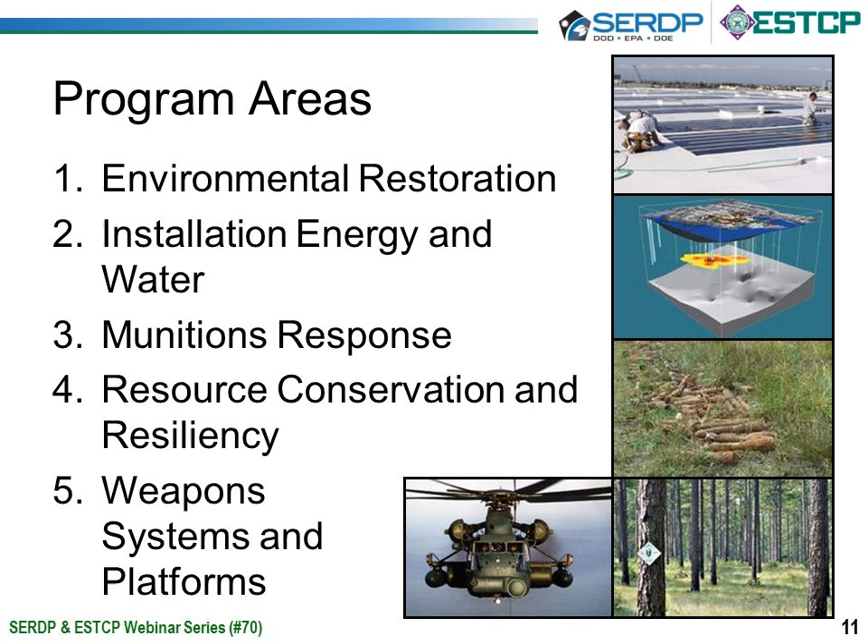Okay, so Weapon Systems and Platforms has 5 program areas. Surface engineering, which these projects fall under, as well as energetic materials and noise and emissions, and lead-free electronics is another area that we have some efforts in. Okay, going to slide 13.

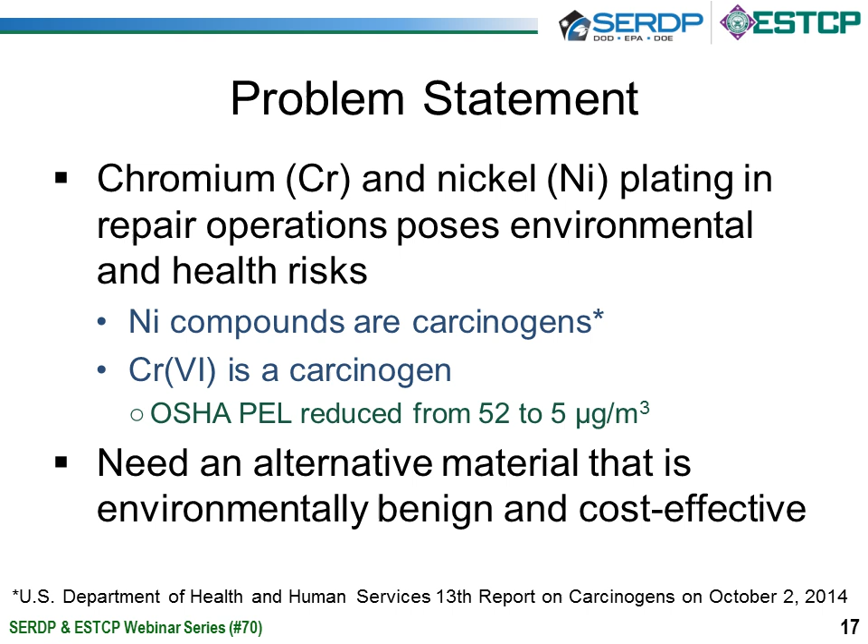So Integran's main technologies involve nanostructured materials. And we started the original project with the question of, can a nanometal coating provide a suitable replacement for hard chrome? So first off, I'll just very quickly describe what we mean by a nanostructured metal. A nanostructured metal is simply a metal coating that has a grain size in the range of 10 to 100 nanometers.

So conventional metals are crystalline and they have grains. And the grain size of a conventional metal is between maybe 10 and 100 microns. So with a nanostructured material, you just simply reduce that grain size, so the grain size is in the order of about 20 nanometers. And by doing so, you get very interesting property changes, specifically as it relates to the hardness and the strength of the material.

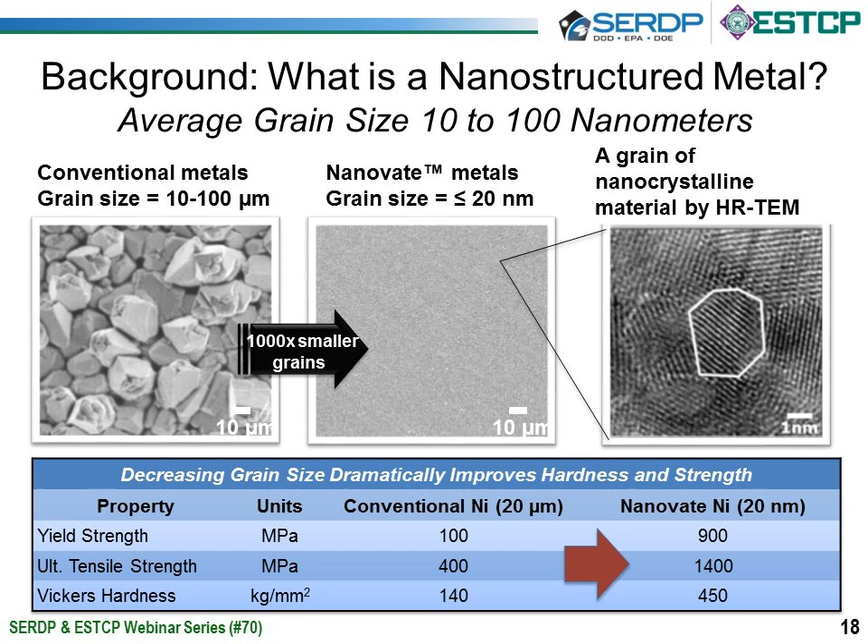As an example, going from a conventional nickel with a 20 micron grain size to a nanocrystalline nickel with a 20 nanometer grain size, you get an increase in yield strength from about 100 megapascals to about 900 megapascals. And similarly, you get an increase in hardness from 140 to about 450 Vickers hardness. So you see tremendous property changes when you just simply reduce the grain size of the material.

So the way that we create our nanostructured materials is through a pulse electrodeposition process. So similar to chrome and nickel, it's made in an electrodeposition process. So you produce the coatings in aqueous baths, you apply a current, and you deposit the metal ions in the solution onto your substrate in the form of a coating.

So traditionally, we've used pulse electrodeposition in order to create the fine-grained structures. And what that achieves is a very fine-grained uniform structure throughout the thickness of the coating. In conventional plating, typically you see a fine-grained structure right at the interface. However, as you grow to thicker structures, you commonly find the grains elongate to larger grain sizes. Through the use of pulse plating, you can favor the nucleation of new grains over the growth of existing grains, and this results in an ultrafine grain structure through the thickness of the coating.

And the ultimate end result of the coating is a fully dense metal with a nanocrystalline grain size. And I should mention at this point that there's no powders involved with the production process. We go from ions in solution to fully dense metal on the plate, and there's no intermediate powders involved. So one of the objectives of our current project, in fact, was looking at whether or not we can produce these structures without the use of pulse plating. So I'll go into that a little bit later when I talk about the project.

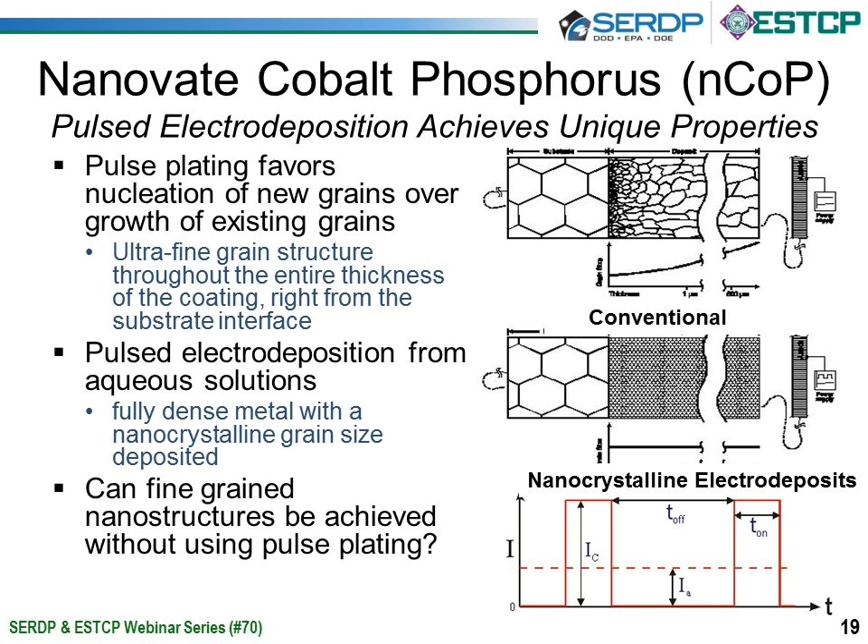So after many iterations and looking at a number of different materials, we settled on a cobalt phosphorus alloy composition as the preferred solution as an alternative for hard chrome. So the nanocobalt phosphorus is simply an electrodeposited nanocrystalline cobalt phosphorus alloy. So it's primarily cobalt with about 1 to 2% phosphorus, and it's electrodeposited with a grain size between 10 and 20 nanometers.

It's a cost-effective process, and similarly to chrome, it's done through electrodeposition, and it provides significantly improved corrosion resistance, lower friction, better ductility and toughness compared to electrolytic hard chrome. And there's now a military specification as well as an AMS specification for the process.

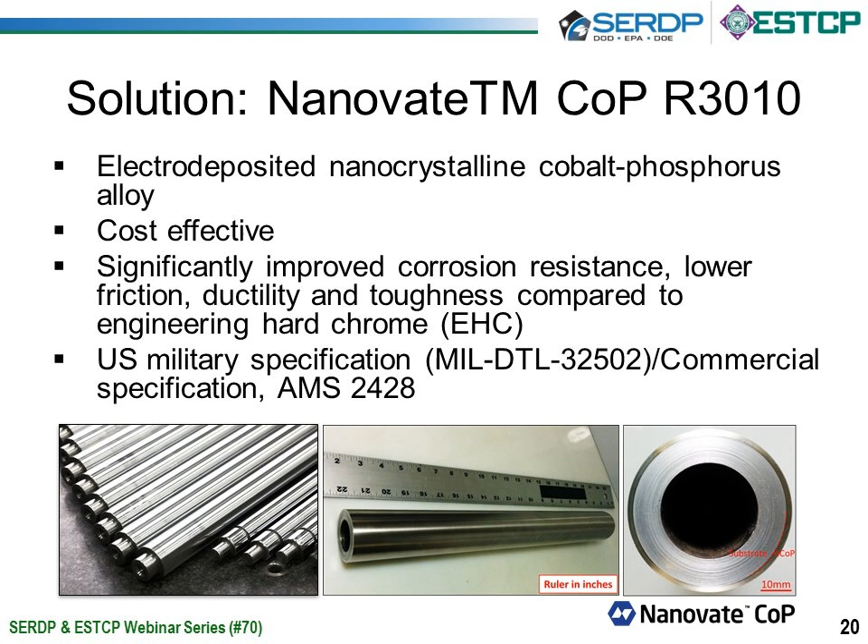A quick comparison between the processes for nanocrystalline cobalt phos and electrolytic hard chrome. One of the big advantages of the cobalt phos is the faster plating rate than chrome. So it plates about 5 times faster. So this can result in increased throughput, and you can replace several hard chrome tanks with one cobalt phosphorus tank. And the bath is very stable.

So going through the parameters, the nano cobalt phos traditionally plates with pulse plating. We're looking into DC plating, compared to DC plating with electrolytic hard chrome. It can plate line of sight and non-line of sight surfaces. It has a very high efficiency, so this is the conversion of the electrical current that you put into the process versus how much of that goes to reducing the metal versus producing hydrogen. So it's much higher than chrome, resulting in a faster deposition rate compared to chrome.

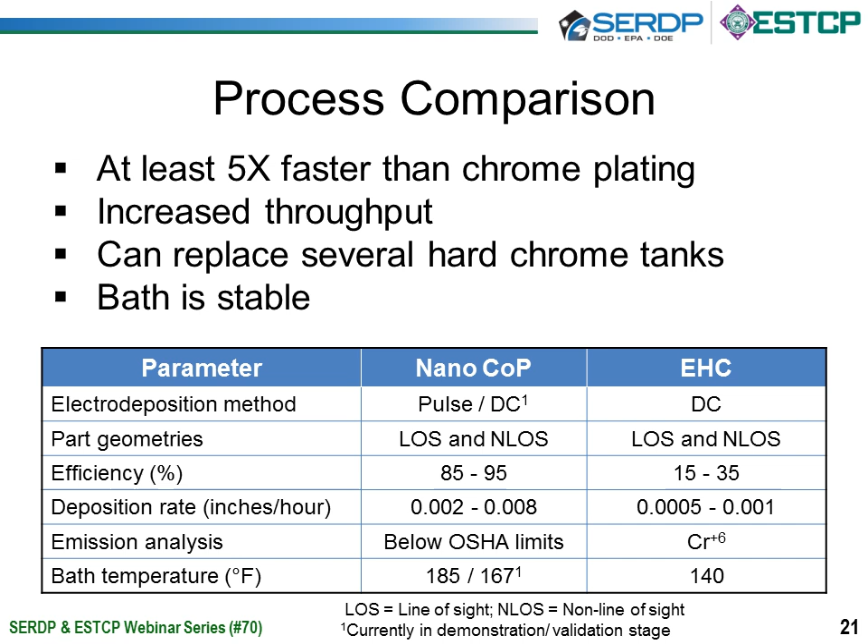The other advantage is since you're not producing a lot of hydrogen at the cathode, you have significantly less gassing that comes off the process and a lot lower mists. Through the emission analysis that we've looked at, it's been well below the OSHA limits for cobalt. And the bath temperature is a little bit higher than that of chrome, which we're also addressing in this current project, which I'll talk about a little later.

So a lot of work went into the cobalt phosphorus development to date. So I won't go through all the property comparisons, but one in particular that I'll just mention today is regarding the corrosion. This is a salt spray corrosion compared to hard chrome. And this is an area where we see significant improvement. So we've tested it out against a number of electrolytic hard chrome vendors, and we see that the time to red rust with the cobalt phos is significantly higher, going from about 200 hours time to red rust to over 1,200. So this is really one of the areas where it performs very well.

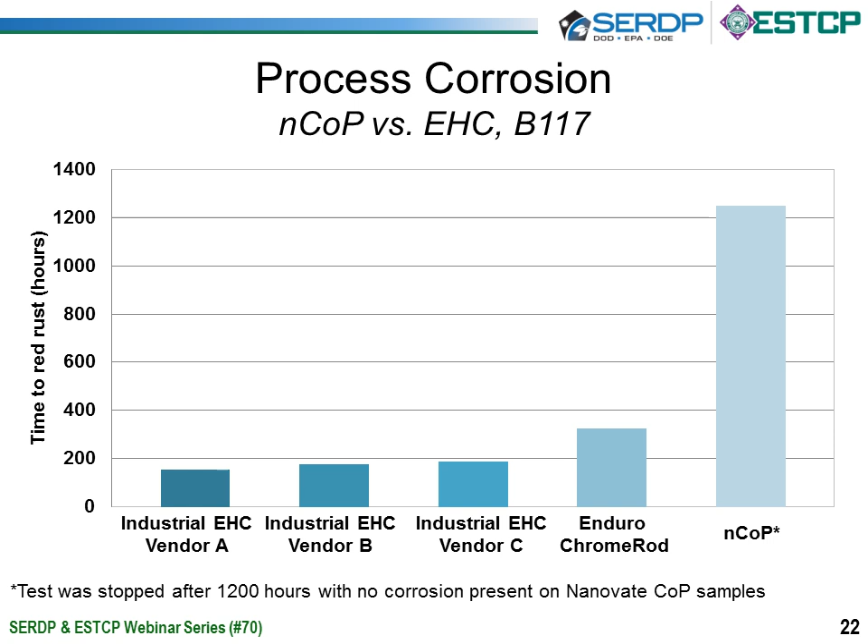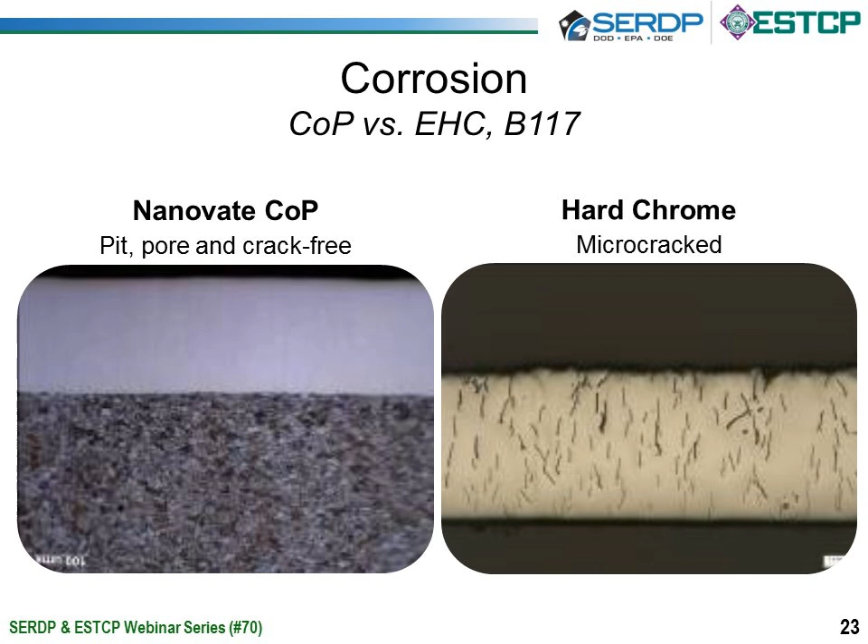It's a very stable process. The tank in our facility has been in place since 2005, and it's the original solution that we're still using in the process. A successful ESTCP demonstration validation was completed in 2015, resulting in a number of good properties and good property data supporting the use of the coating for a number of applications.

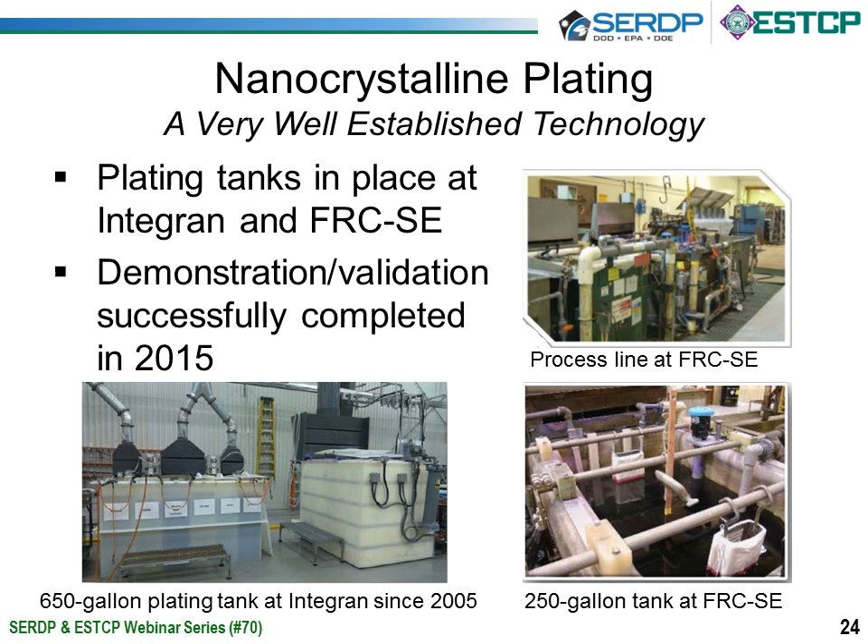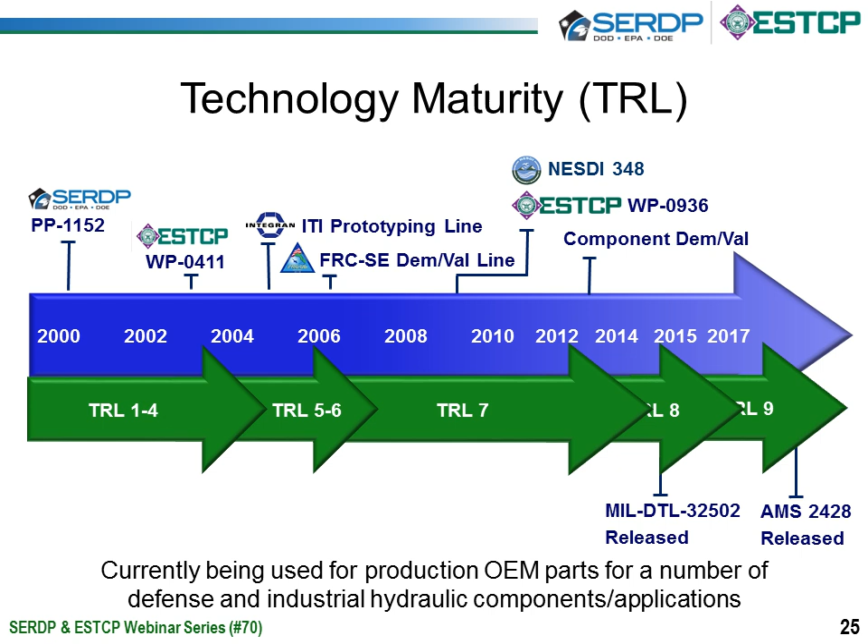So on that note, now I'll move on to our current SERDP project, which is SERDP WP 2609. In this project, the objective is to look at it as a replacement for hard chrome, including nickel plating, and specifically targeting repair operations. So we're looking to develop and validate an alternative repair technology based on the nanocrystalline cobalt phos alloy, as well as address some of the usability issues that have been identified in the past.

So specifically what we're looking at doing is trying to meet and exceed the properties of both nickel coatings and electrolytic hard chrome coatings according to the various mil standards, and as well demonstrate that it can be used for selective plating and repair operations in order to rebuild worn parts.

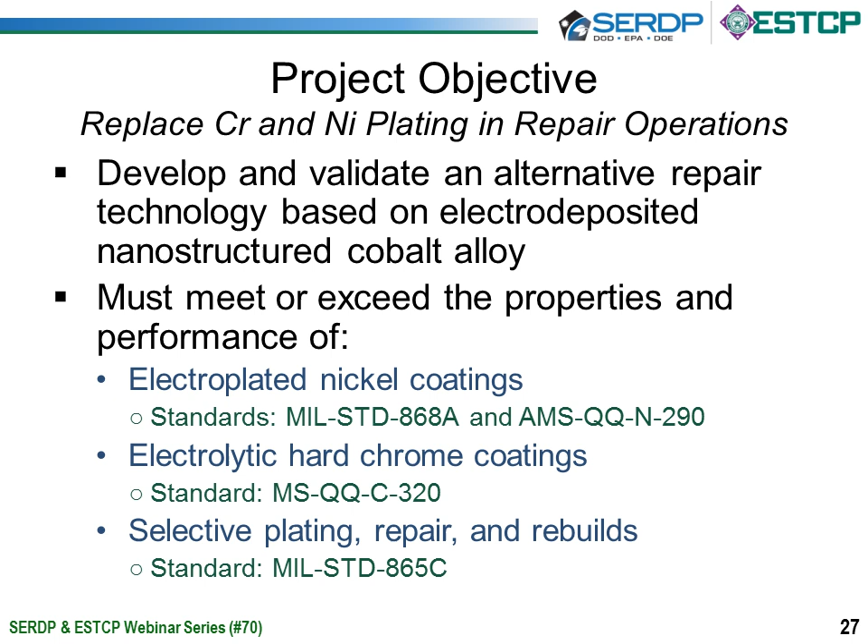So the project team includes us here at Integran Technologies, and we've also partnered with a company called Cirrus Material Science, located in New Zealand, and they have a very interesting new technology that basically forms very small nanoparticles in the solution which co-deposit at the interface during the deposition process.

We've also partnered with Corrdesa, who's looking at the electrochemical modeling of the various new matrices that we're looking at, and again working with the Fleet Readiness Center, Ruben and Jack at NAVAIR as the ultimate stakeholder and end user of the technology.

So the project objectives we divided into three main areas, basically looking at the material for use in repair operations, but also seeing ways that we can improve the process and performance. The first project objective involves looking at ways that we can optimize the current cobalt phos process, with modifications to the chemistry so that we can do direct current plating. We're also looking at ways that we can lower the plating temperature of the solution to make it more compatible with existing processes at Fleet Readiness Center.

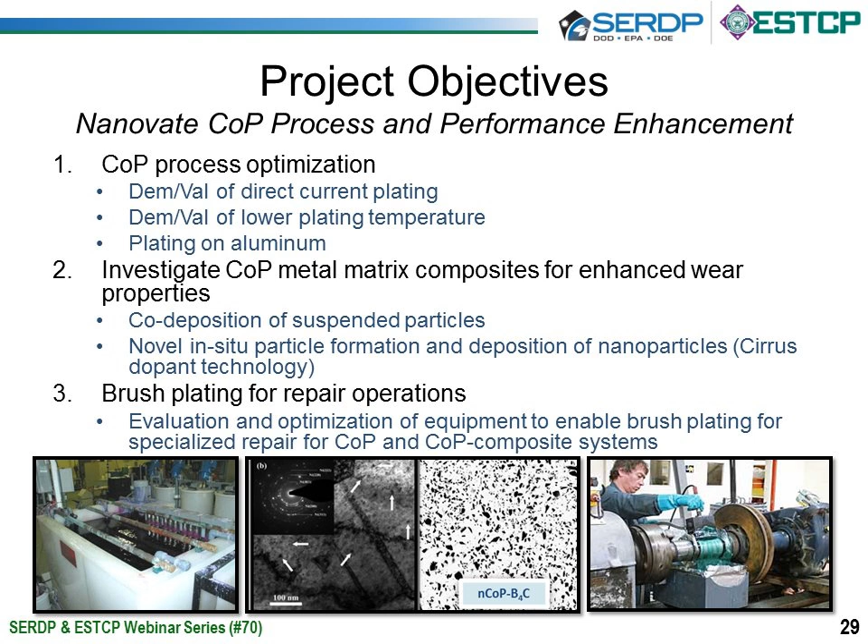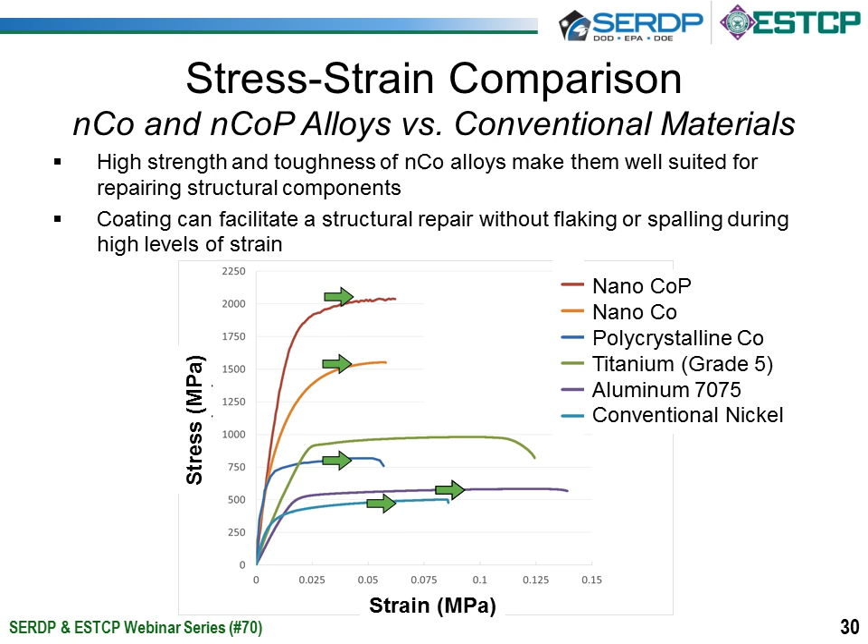So now I'll move into some of the results that we've had in our project. So related to objective number 1, where we're looking at further optimization of the process, we're looking at both using direct current rectifiers as well as lowering the plating temperature. So we conducted a number of design of experiments where we looked at various process and chemistry parameter tweaks. And then through that, we were able to identify a window of operation that results in being able to plate at slightly lower temperature as well as using direct current as opposed to pulse plating. And this is mainly due to the addition of some chemistry and some additives. But the big benefit is now there's a nice, slightly enhanced operating window for lower temperature, as well as increased current density and direct current plating.

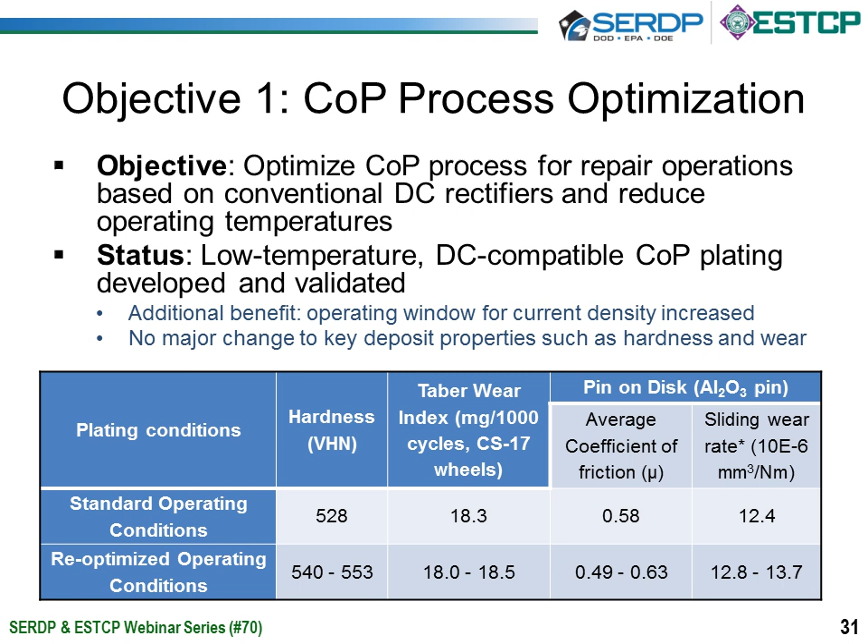After initially identifying the window of operation, we produced a bunch of panels and compared various properties against the standard operating conditions. So we found that compared to standard operating conditions, everything matched up very well. The hardness was in the similar range. The abrasive wear resistance was very similar, and we still had good sliding wear and coefficient of friction as measured in pin-on-disc testing.

So the second part of Objective 1 was to see if we can tweak the process in order to more readily coat on aluminum. In the past, we have been able to use the standard process to coat on aluminum. However, the high temperature of the process as well as the lower pH of the process did result in some concerns with coating onto aluminum, since the solution was fairly aggressive if any aluminum was exposed while you're coating. So if you're fairly encapsulating and putting a part in, coating all surfaces, it's no problem. But if you're masking certain areas when you're coating aluminum, if there's any issues with the mask, then you could have some corrosion. So we looked at modifying the chemistry specifically for plating onto aluminum substrates, and were quite successful and developed a slightly new process, which we call the 3311, which was able to successfully coat onto the aluminum without any risk of damage.

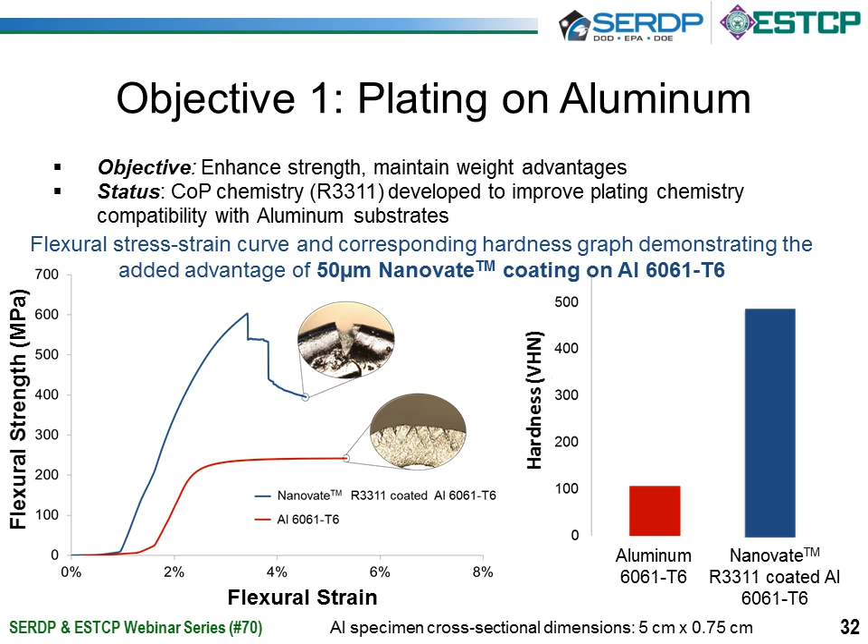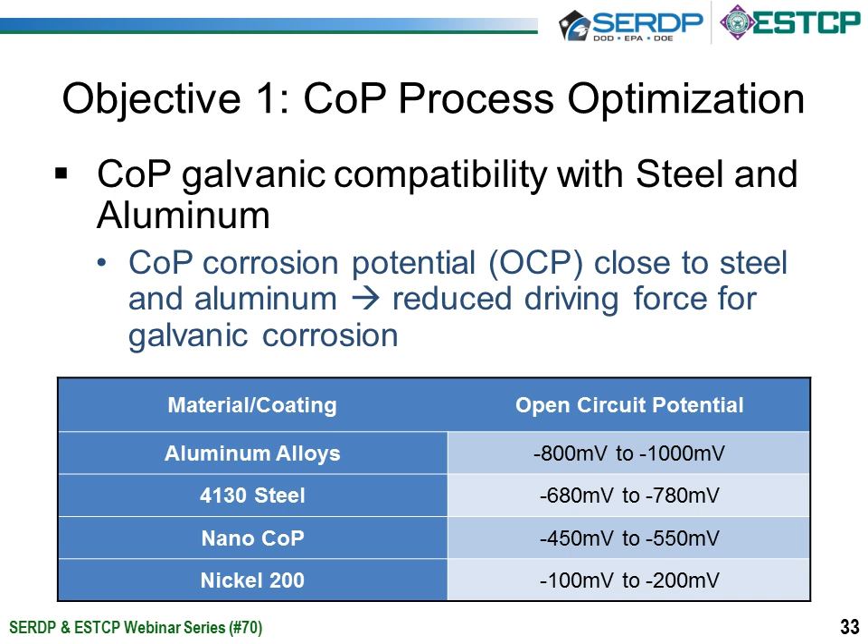So the other advantage of the Cobalt Phos when looking at coating steel and aluminum substrates compared to nickel and chrome is the corrosion potential of the Cobalt Phos. The open circuit potential is closer to that of steel and aluminum, so ultimately likely resulting in a lower driving force for galvanic corrosion between the coating and the substrate. Ultimately, hopefully leading to better long-term corrosion performance.

So the second objective that we looked at was enhancing the properties, or mainly the wear resistance, through the incorporation of various hard phase composite particles. So again, we did this using two methods. One was just the conventional way of putting particles into the solution and co-depositing the hard phase particles, and the other was through the use of the Cirrus dopant. So we were successful in co-depositing various particles. I believe we looked at a number of different particles and a number of different particle sizes. And the graphs here show both the hardness as well as the abrasive wear resistance as measured from the Taber wear test.

The Taber wear test curve is in red and the hardness is in blue. So what we saw in all cases, the incorporation of particulate increased the hardness of the coating. And as well, we saw a decrease in the Taber wear from about 18 down in some cases to about 4. So we were quite happy with these results showing the benefit improvement.

The Cirrus dopant, we found that it did increase the hardness, and the Taber wear results, the abrasive wear results, did improve. However, when we looked at the cross-sections of the coating, we felt that there weren't sufficiently enough particles co-deposited to result in a significant decrease in Taber wear. And Cirrus is currently optimizing their process and has recently produced new dopants that we're currently testing, and we're hopeful that they result in even better performance than we're seeing right now.

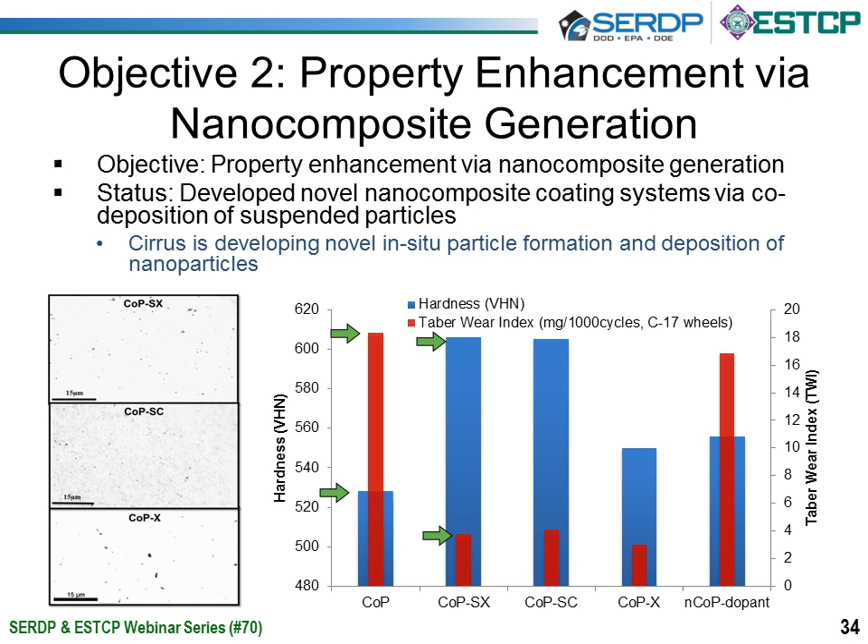So the last objective that we looked at was taking this new technology, the new process, and applying that to selective area repairs. First, we looked at brush plating. So basically, rather than dipping your part in your tank, now we're using brush plating to flow solution through a brush plating head onto a sample and then coating it.

So we produced a number of samples and we looked at the hardness as well as the Taber wear. And we saw similar performance of the tank plated material as we did with the brush plating. So we saw a significant reduction in the Taber wear as well as an increase in hardness with the incorporation of particles.

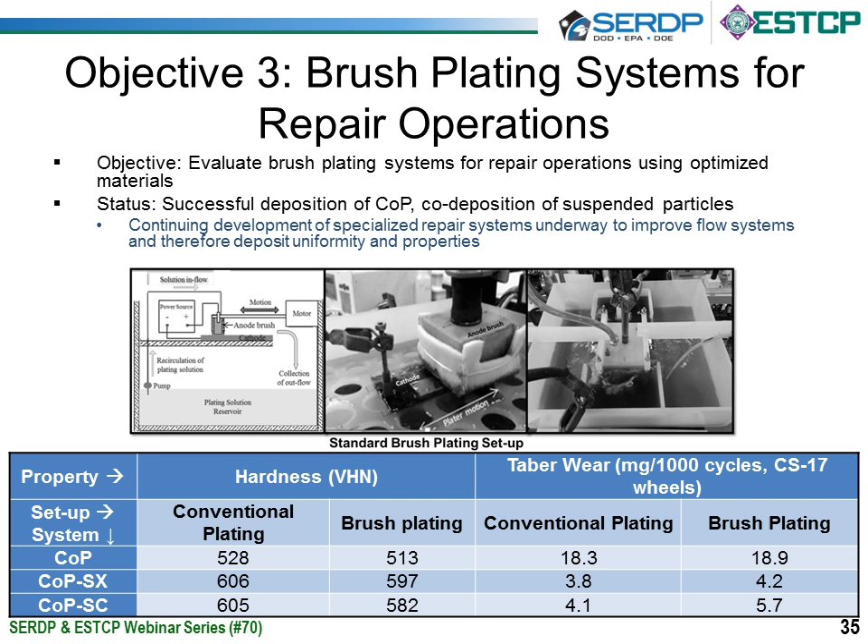So a quick summary of what we've achieved to date in the project as it relates to benefits to the DoD. Objective number one, the process optimization, results in DC compatibility, which will result in reduced infrastructure costs when trying to deploy this new technology to conventional plating shops. Pulse plating works very well, and it gives you lots of flexibility. But when looking to put this in a new plant, that results in extra infrastructure cost. So it's great that we can get the process to work with conventional direct current plating, which is the typical type of rectifier you see in plating shops.

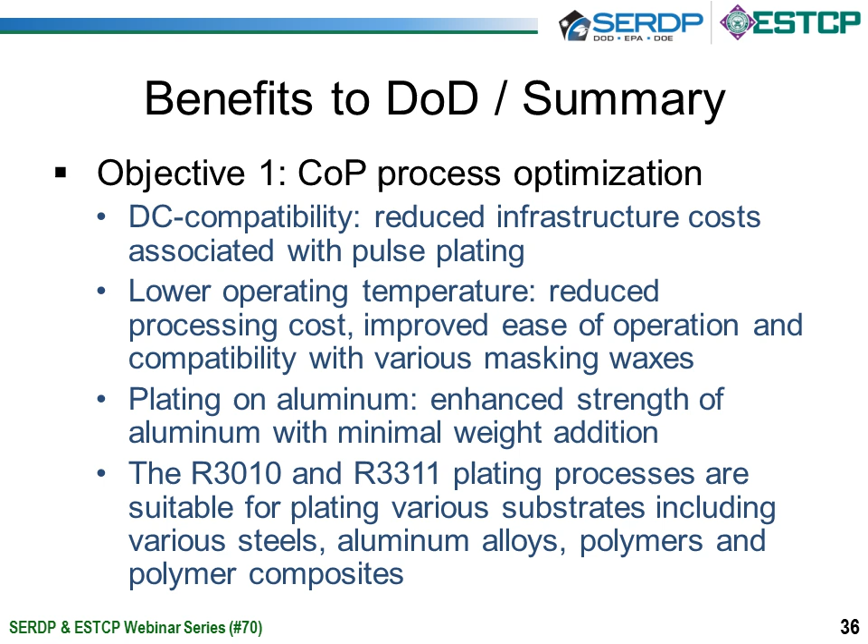The lower operating temperature should reduce processing costs and improve the ease of operation and compatibility with various masking waxes. So that is a good advancement. The plating on aluminum can enhance the strength of aluminum with minimal weight addition. And both the R3010, which is the conventional cobalt phos, and the 3311, which is the process modified for aluminum, are suitable for plating a number of substrates, including steels, polymers, and polymer composites, if you want to extend the technology to new applications.

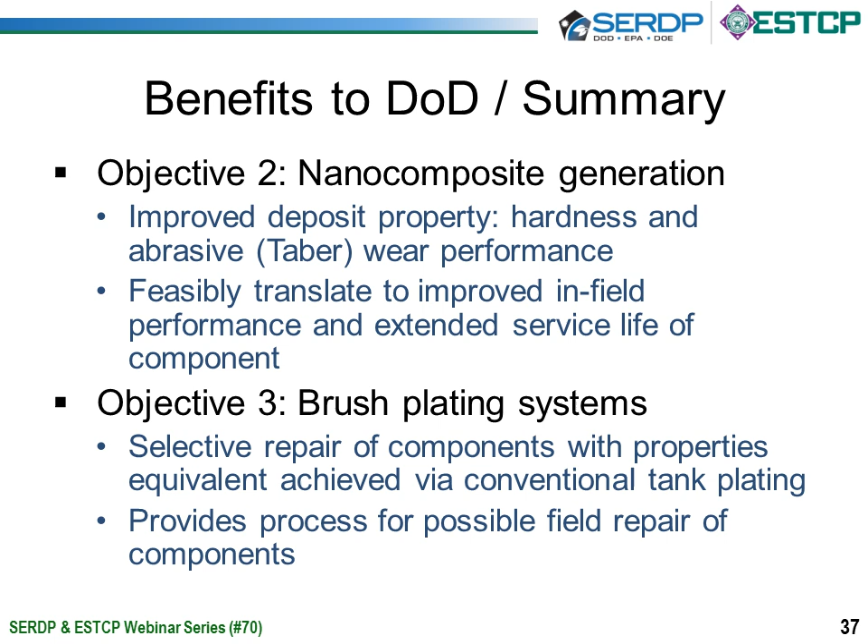Related to Objective 2, the composite generation. It results in superior performance of the coatings, both in terms of hardness and Taber wear, ultimately hopefully resulting in improved field performance and extended life of components. And the extension of the technology to brush plating systems allows it to be used for possible field repair of components, so less costly.

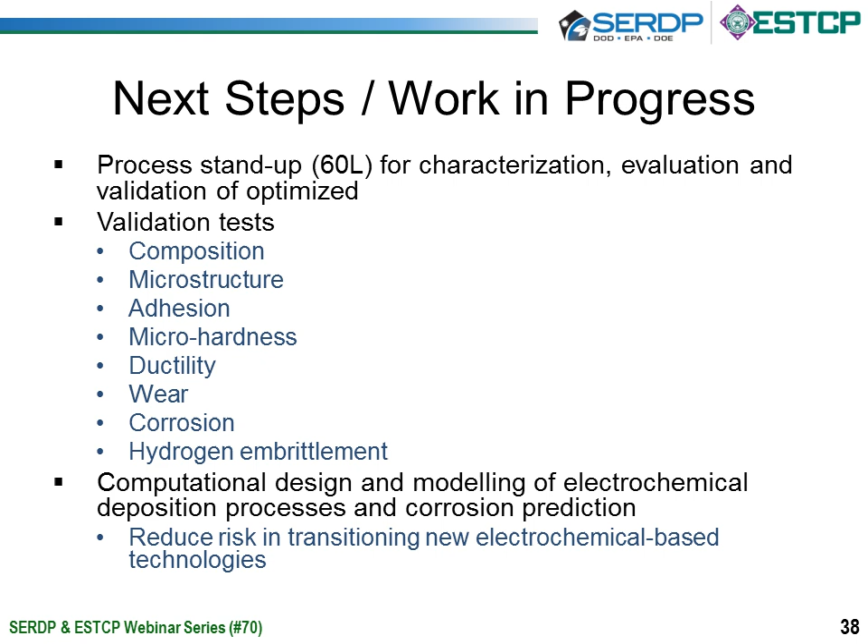So now going forward in the project, we've more or less solidified the operating window and locked down the chemistries. And now we're moving into a small validation test program where we're looking at the composition, microstructure, adhesion, microhardness, ductility, wear, corrosion, and hydrogen embrittlement of the locked-down process at a larger scale. We're very excited about the results that will be coming through, and we're quite hopeful that it will do as well as we hope.

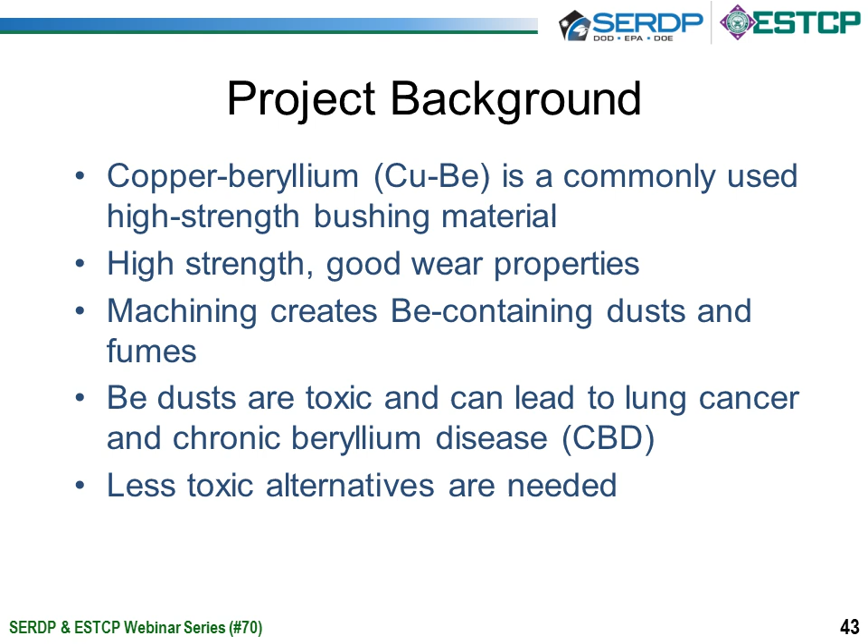The downside is that exposure to beryllium results in a range of diseases: lung cancer, chronic beryllium disease. And the issue is that DoD employees, as other employees, can be exposed to beryllium dust and fumes as a result of the wearing of beryllium-containing alloys during operation, and also during the machining and other fabrication operations. Within the DoD, too, the manufacturing process for copper beryllium bushings results in a large amount of hazardous waste being generated. So we're looking for less toxic alternatives. And the nanostructured cobalt alloy that's the subject of this proposal, we believe, can meet and exceed these requirements.

Okay, next slide is nanostructured alloys. As I mentioned before, of all the nanomaterials evaluated in the SERDP program, the nano cobalt-phosphorus alloys exhibited the most favorable properties as bushing materials. They can be fabricated using an electroform process, which is really a metal forming process by which parts are produced through electrodeposition on a model or a form, which is known industrially typically as a mandrel. The process is essentially electroplating, but with thick deposits formed. In the case of bushings, the mandrel is obviously typically cylindrical with a smooth inner surface.

The material that results is fully dense, needs no additional heat treatment, has a very smooth inner surface. And if the process goes well, the outer diameter is also relatively smooth, so bushings can be produced with minimal machining. Hence, we consider it a near net shape process. I suppose it might be considered an early additive process, or AM process, but it's not quite a fully additive process. As you can see from the images, it's a process that can be used for large and small diameter bushings.

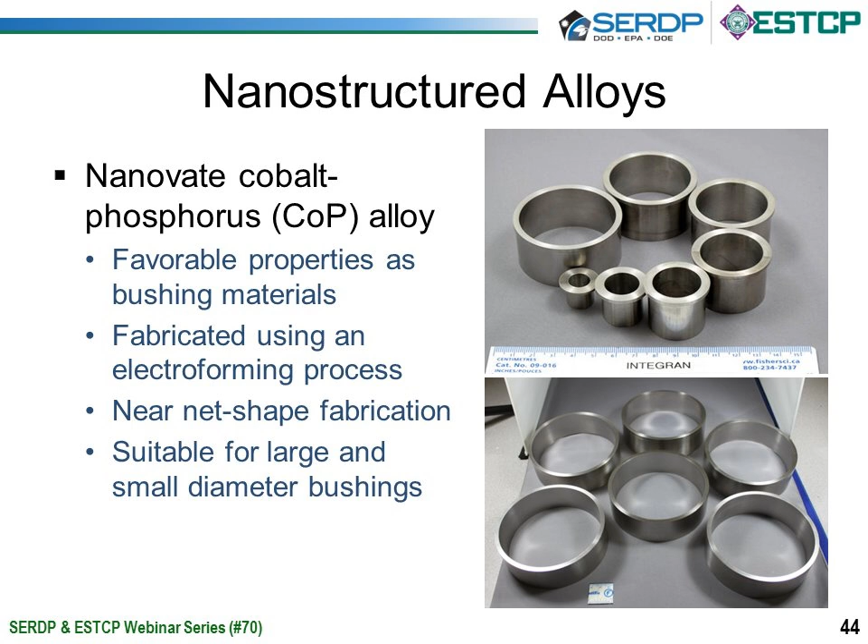So I'll go into the next slide. This is just a very simple schematic of the process. As I mentioned, sort of near net shape. It's quite cost effective, very little material waste. In contrast, copper beryllium is often machined from a block of material, which for a large bushing creates a lot of waste. Here we deposit the material onto the mandrel, remove the mandrel, and then do a little bit of machining to produce the bushings of a desired dimension.

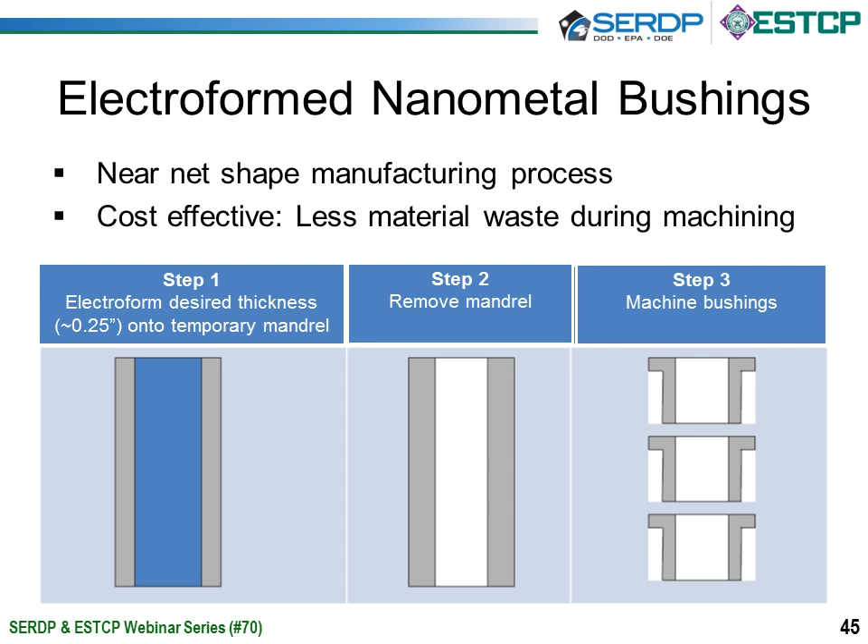So the advantages of nanostructured alloys, John has mentioned those, governed by the Hall-Petch relation, which is a relation which describes the increase in strength of metals with the decreasing grain size. Effectively, the grain boundaries act as pinning points, so they impede dislocation propagation. And this basically hinders the onset of plasticity and increases the yield strength of the material.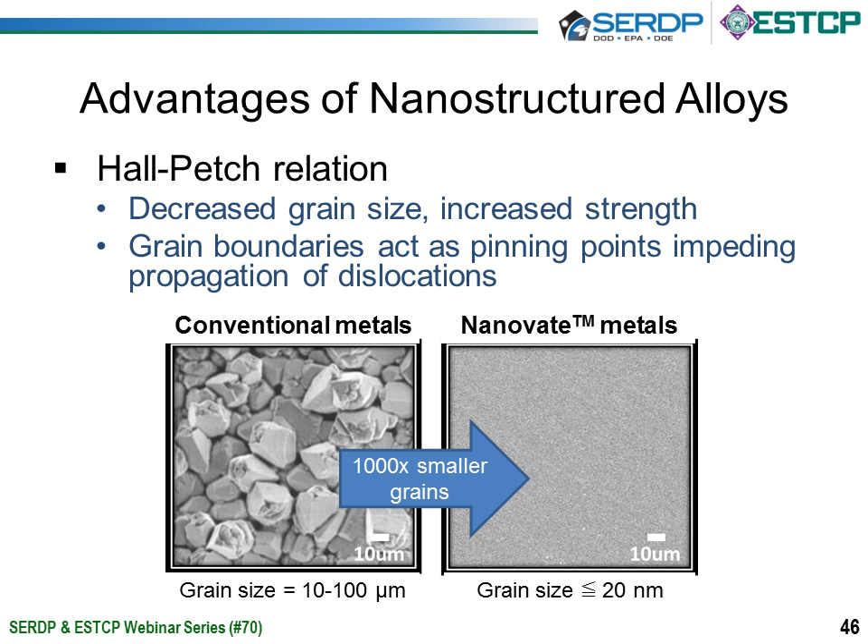This is a relationship that's been known for quite a number of years. I think it was discovered back in the 1940s and 1950s. But with the advent of a lot of nanograin materials, it's been well demonstrated that the optimum grain size is probably around 10 to 20 nanometers. If you go much smaller, there are no further benefits.

I'll move on to the next slide. Just a little bit of data. It's very similar to the data that John showed earlier. Just shows the superior yield strength and ultimate tensile strength of some of these nanocrystalline alloys relative to copper beryllium.

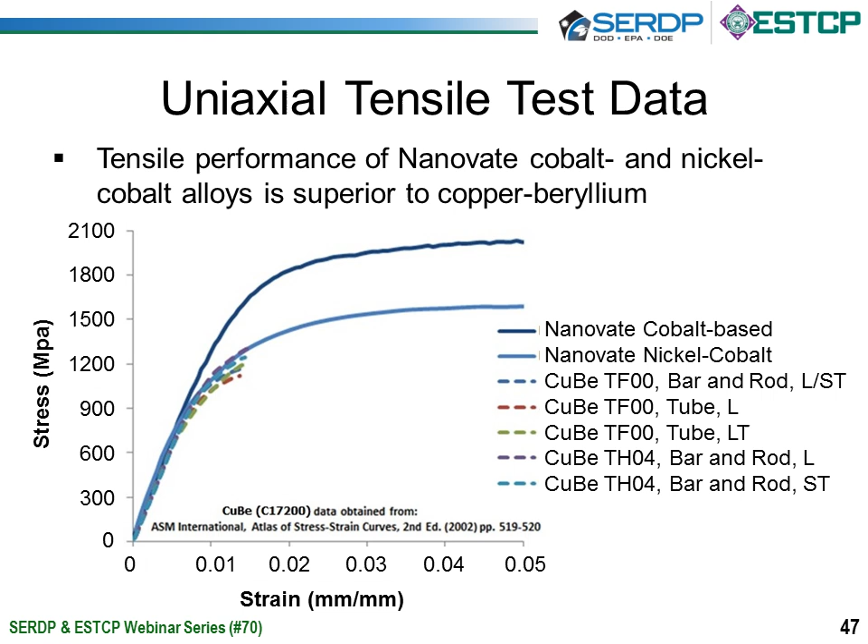So I'll move on now to the technical approach for this program. It's a program in which Integran and NAVAIR are the primary performers. There are 5 major tasks for it, first of which is the manufacturing process, definition, and demonstration. This is a task really to look at to optimize the electroform process and identify the process parameters of interest.

So optimization is really looking at the set of process conditions and parameters to electroform bushings with wall thicknesses as high as ½ an inch. One of the main targets is to minimize the deposited surface roughness. For the obvious reasons that I mentioned, a smooth electroform surface is desirable. It just minimizes the amount of machining required to grind it smooth and minimizes the amount of material waste.

Property and performance testing, again, fairly self-explanatory. Basically, we need to collect enough material data to understand how the material behaves and to generate some initial design allowables such that parts can be placed on board aircraft.

Third is the depot evaluation insertion part of the program. Ultimately the goal is to transfer this technology to NAVAIR depots. We're working currently with Fleet Readiness Center Southeast on this. Jack Benfer and Ruben Prado, who John mentioned in his talk, are part of the project team and really the primary DoD stakeholders for the program.

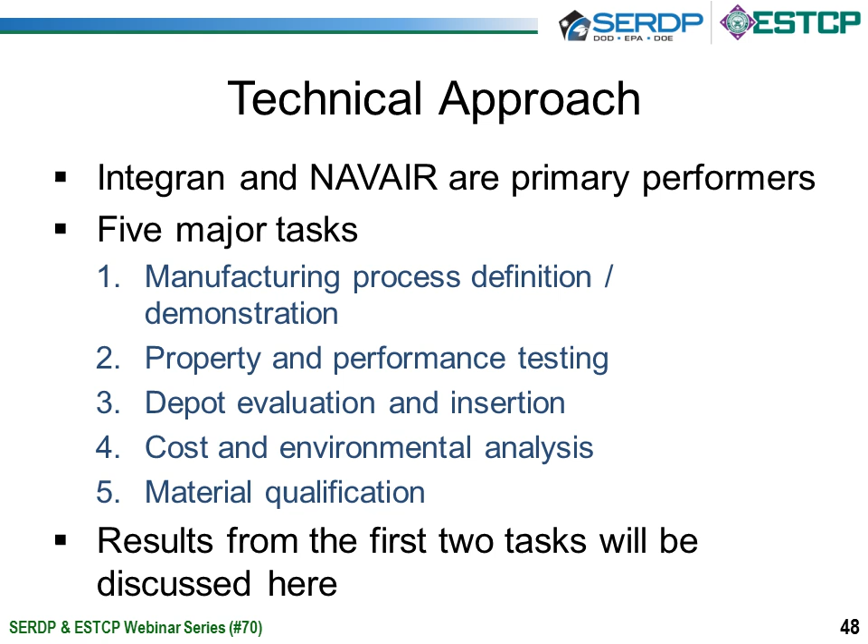So in this talk, I'm just going to discuss briefly the results from the first 2 tasks, since these are the tasks which have been active over the past year. Okay, and the first task is pertaining to the tank installation at Integran. Integran's goal was basically to design and construct a dedicated bushing tank, which they did. The specifications are provided here.

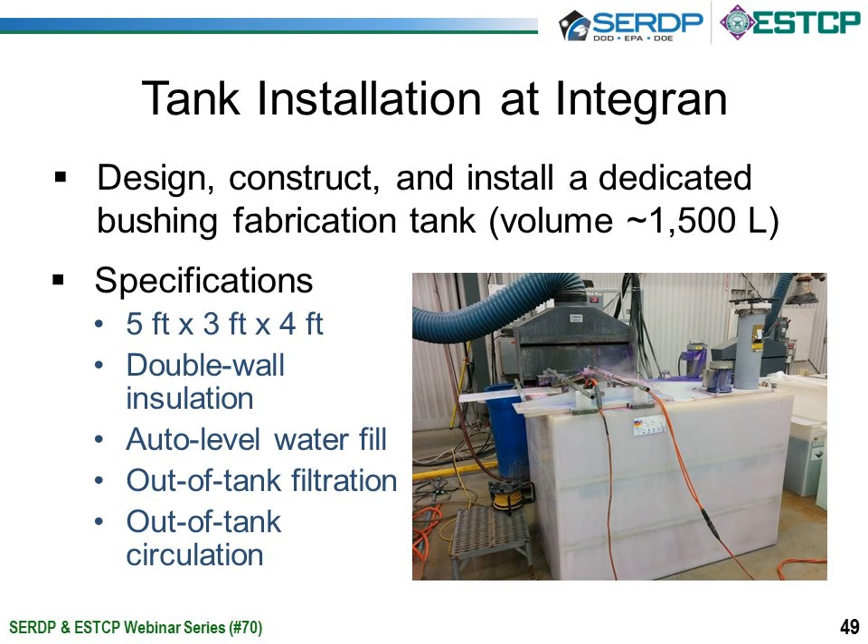It's around a 400-gallon tank, 1,500 liters. It's double wall insulated, auto level water filled, has out of tank filtration, out of tank circulation, and it's in place at their Mississauga facility outside of Toronto. The goal really is to take lessons learned from this experience and transfer the know-how to Jacksonville.

So the next slide. The goal was really to specifically optimize the electroform process for this material, and specifically with the intent of electroforming bushings. Another goal was really to come up with a reusable mandrel design. The initial ones were just stainless steel rods. They were disposable. They were machined out of the electroform. Obviously, this is not a cost-effective process, and from a waste perspective, really not desirable. So that was also one of the tasks.

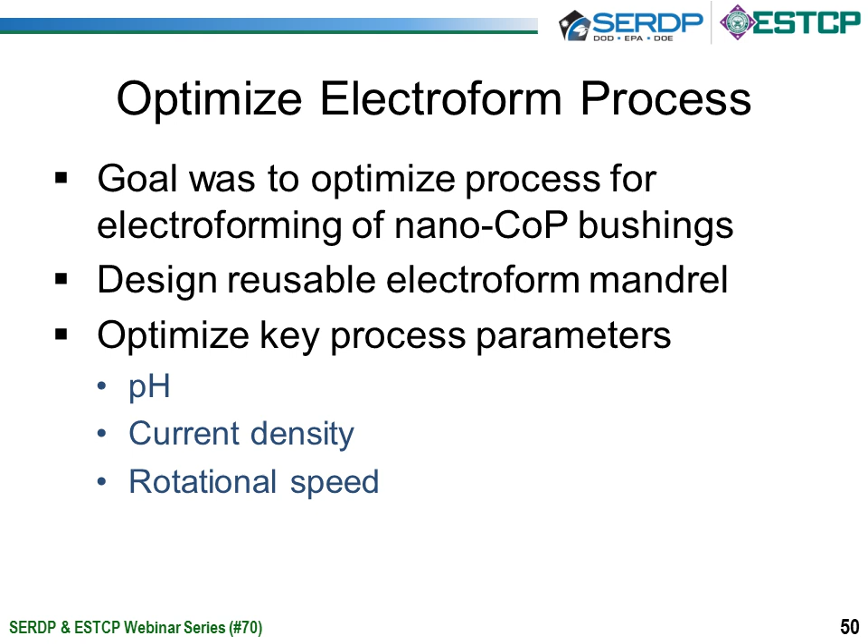The three key process parameters that were identified were pH, current density, and rotational speed. And so I'll go over these individually. In terms of mandrel design, we looked at 4 different designs. I probably could have used some images here, but we'll just go with my descriptions instead.

The first of these was a metal sleeve with a collapsible interior core. The sleeve was prepared at Integran. It was a nickel cobalt sleeve. So you lock the core in place. It holds the sleeve rigid, you plate on top of that, and at the end of the plating process, the core collapses and is removed along with the sleeve.

Design number 2 was a metal sleeve with a polymer core, a solid polymer core. The core fits loosely at room temp, but as it expands at the deposition temp, it fits snugly, and then on cooling can be removed along with the sleeve. The third design was basically disposable, was machined out, and then the 4th design was a metallized polymer core, similar to design number 2, but in this case the core was directly metallized instead of being a sleeve.

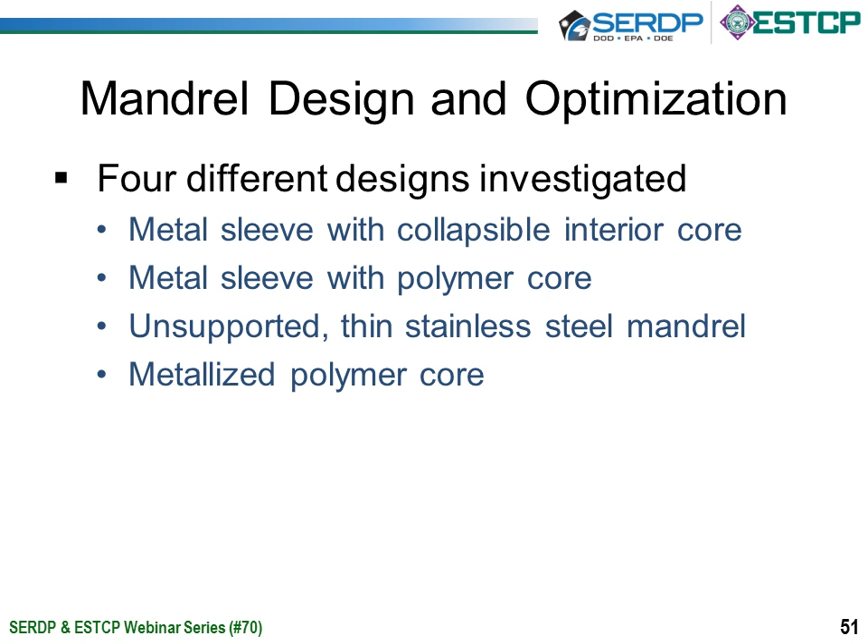So Integran came up with ranking criteria for each of these designs, and they conducted a large number of trial runs for it. In terms of ranking, of course, red is worst, green best. Overall, of the 4 designs, design number 4, which is the metallized polymer core, was probably the best overall. All had some merits.

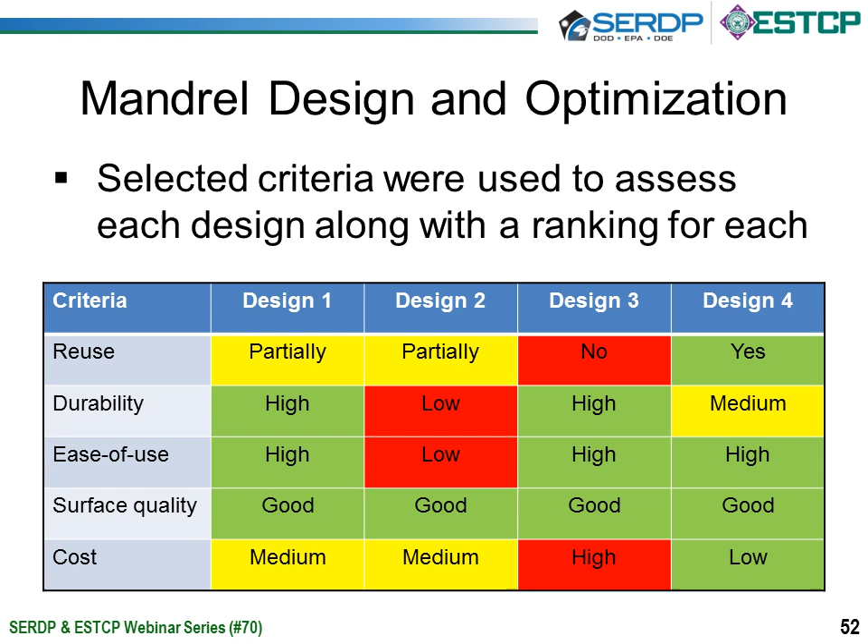I think the conclusion was that ultimately the type chosen may be somewhat dependent on the application. Maybe for one-off designs, design 4, which is the lowest cost, may be best. For higher end applications, perhaps design 1 may be better, since it's a little more durable.

In terms of process optimization, I'm not going to go into huge detail regarding the 3 process parameters. Integran did a large amount of empirical evaluation looking at each of these parameters, both individually and in conjunction with one another. In terms of pH, it was found that at low deposition thicknesses, the outer surface roughness was somewhat independent of the typical pHs employed in these baths.

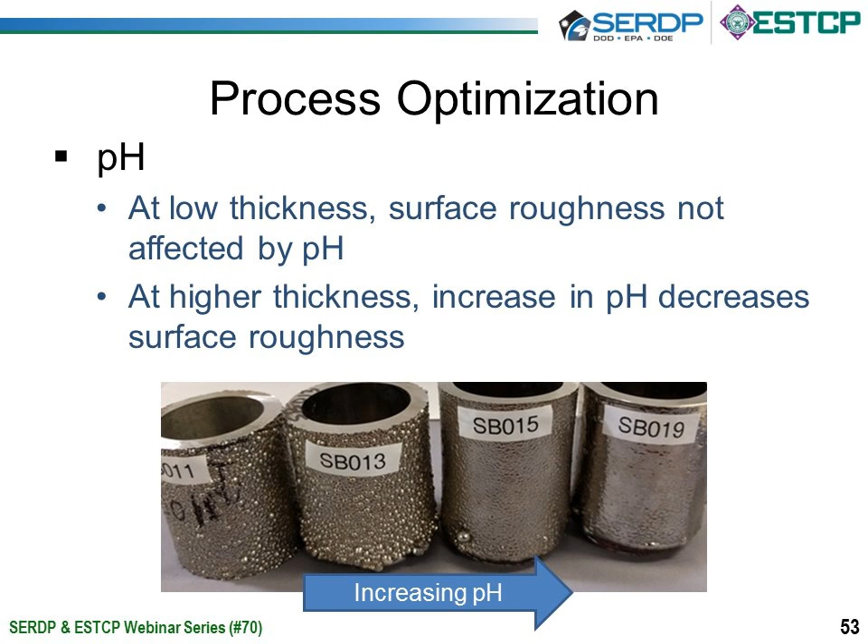There are clear differences. Obviously those on the right are quite a bit smoother than those on the left. There are still some nodules there, so there's still some minor improvements needed. But overall, it did show that increasing the pH to a specific level was important for producing thick deposits.

Similarly, for rotation speed, slide number 54, at low thickness the rotation speed didn't have a significant effect. But when we went to higher thicknesses, a low rotation speed also led to a lot of surface roughness. And you can see all the nodules in the image on the left, which are significantly reduced when the rotation speeds were increased.

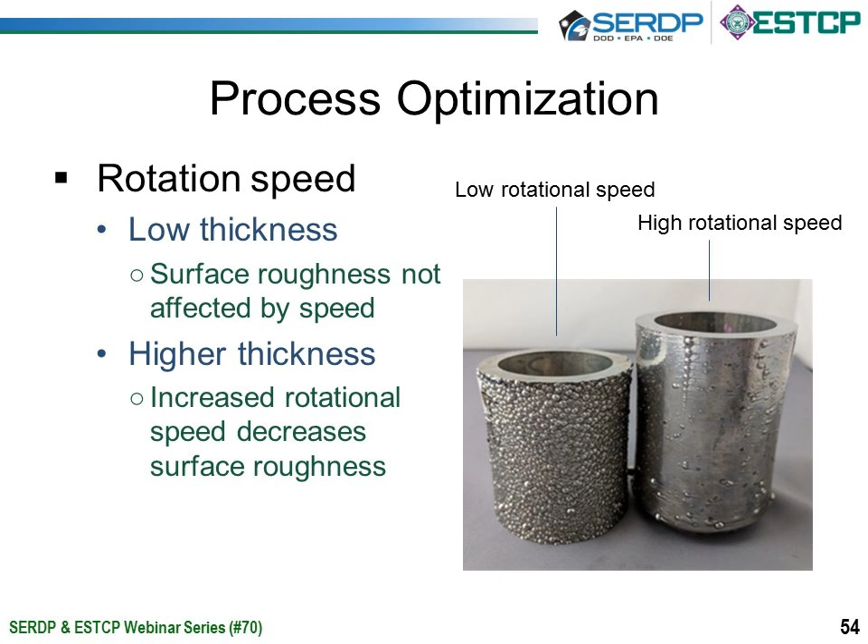So current density was the final process parameter that was looked at. Electroform processes typically use very high current densities. And initially, for low deposition thicknesses, there really wasn't a whole lot of effect. But as it started to get around 5 to 10 millimeters thick, and you can correct me if I'm wrong here, John, roughness became more of an issue.

And it was found that if at this point you just started to reduce the current density slightly, the issues were largely resolved. And although the coating rate was diminished slightly, the effects really weren't significant. So these were the three process parameters of interest. The process is now considered fairly stable. All of these parameters have been optimized for the electrodeposition of nano cobalt phosphorus for the bushing application.

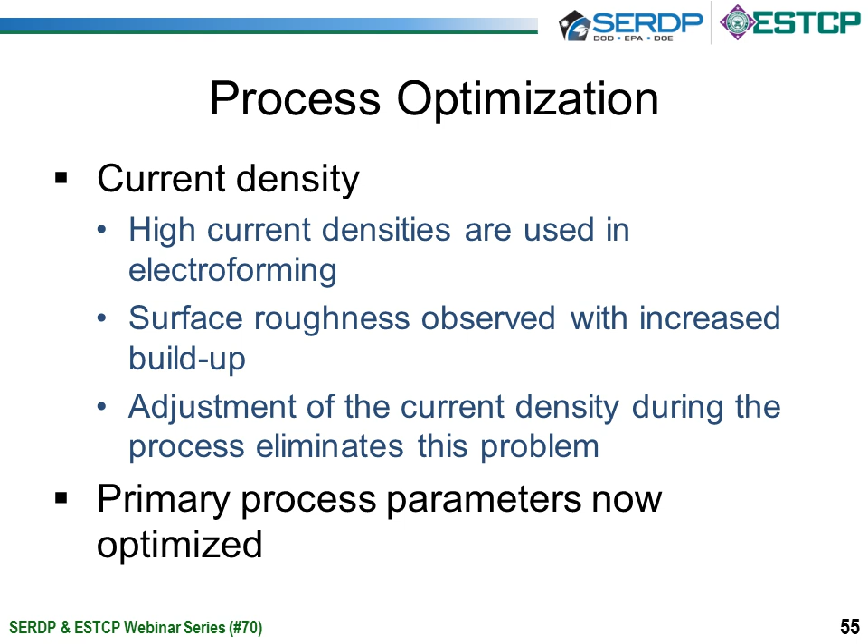In terms of process verification, Vickers microhardness has been primarily used to assess the uniformity of the deposit, and through-thickness measurements really haven't shown much variation at all. It's very, very consistent, around 550 Vickers number. The blue line in the plot on the left shows the point at which the current density was changed during the deposition process. And as you can see, it really didn't have much effect on the material hardness.

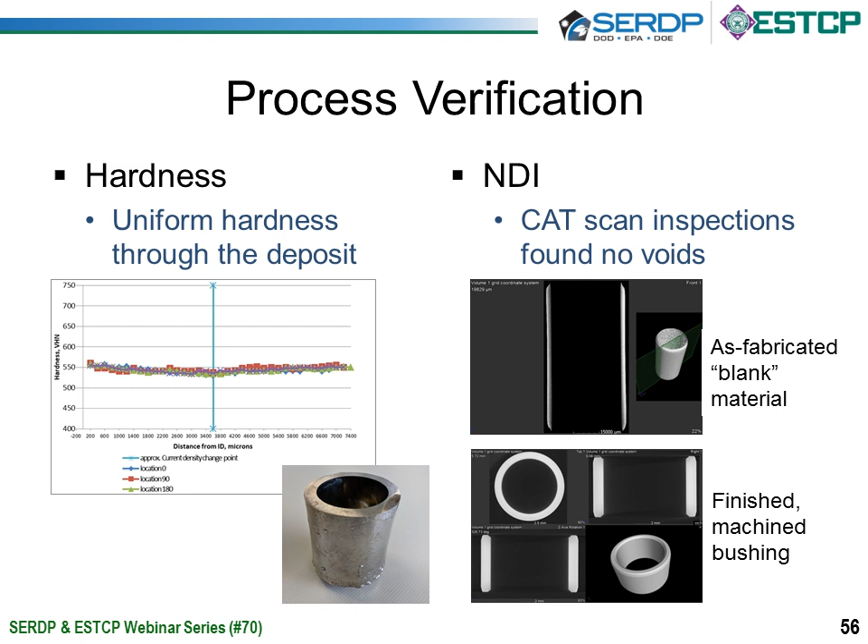In terms of other process verification techniques, some NDI has been performed on these electroforms, CAT scans primarily. We have found no voids in the material, and the analyses have been done both on the as-fabricated blank materials and on the fully machined bushings. I think the voxel size for the blank material was around 15 microns, maybe a little lower for the fully machined bushing. So certainly any voids that are in there are smaller than that.

In terms of property and performance testing, we have developed a joint test protocol. It's fairly detailed, and I'm not going to go into all the proposed tests here. In terms of mechanical testing, the main tests that are planned are tensile testing, compression testing, and fatigue testing. Obviously all key properties for bushing materials under high load conditions.

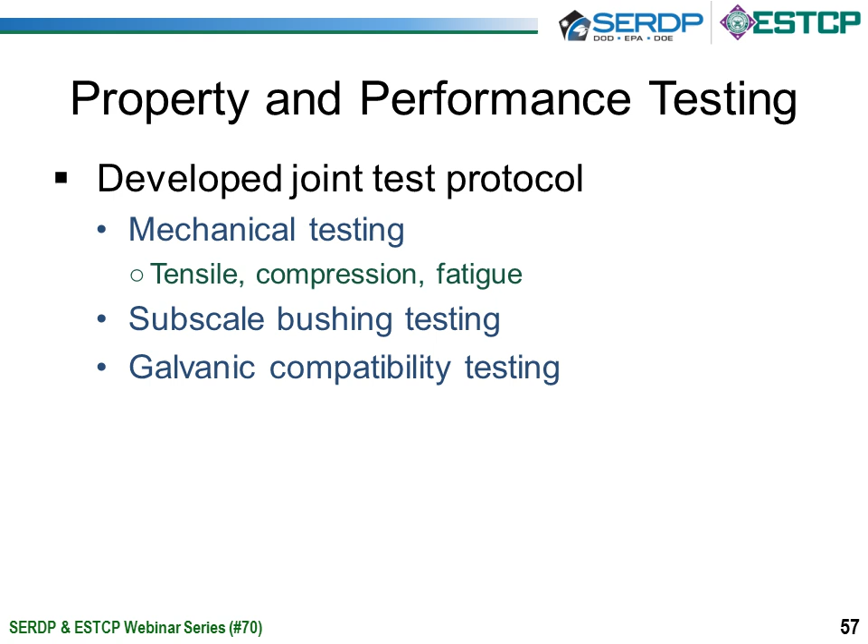We also plan to do significant subscale bushing testing here at NavAir, and also some galvanic compatibility testing. That's obviously a key issue, making sure that any bushing materials are compatible with primarily aluminum aircraft alloys.

In terms of the bushing testing, we did some initial subscale tests. They were tested according to an SAE spec 81934, which is a test for unflanged bushings. It's normally applied to a Teflon lined bushing; the Teflon really acts as the wear surface and the lubricating surface. So it was a very demanding test for these materials since they were run unlined.

However, although the absence of the liner meant that the wear requirement wasn't met, the bushings actually showed very linear wear. There was no obvious damage to them. There was no distress on the wear surfaces. And the testers also observed a very low sound generation for these materials, given they were tested in the unlined form. So although it's not an ideal test, and we will conduct future tests on these materials, the results were overall encouraging, and I think they certainly merit future work.

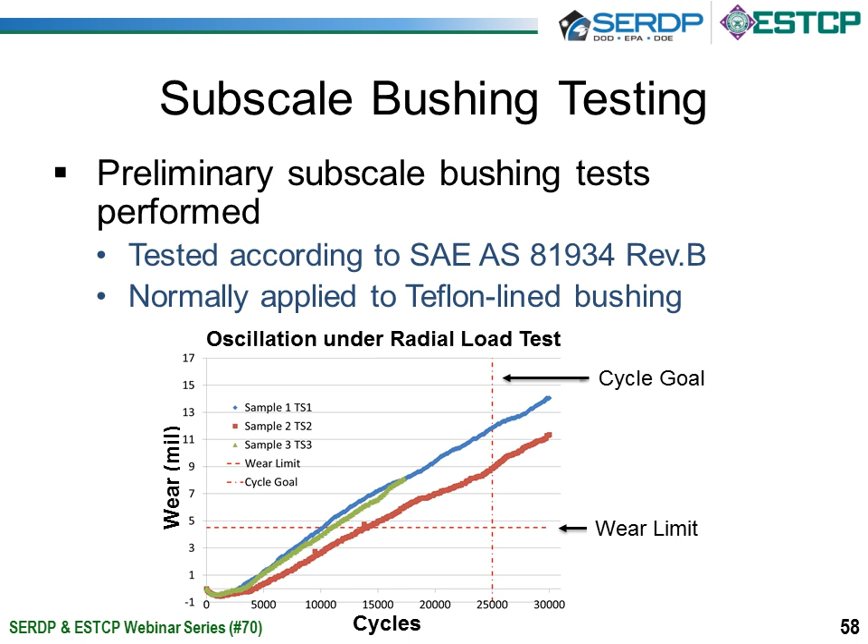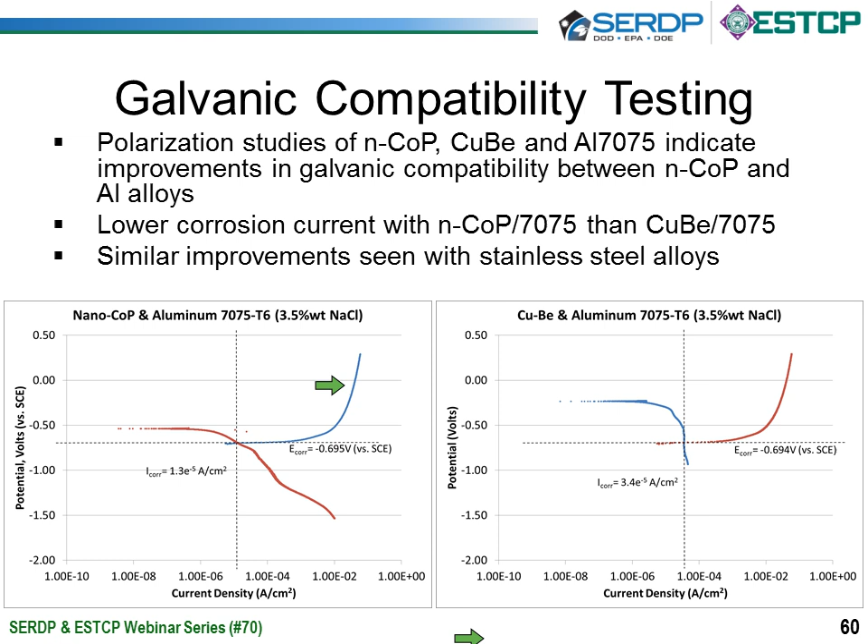In terms of depot evaluation, the goal, of course, is to transfer the technology to the fleet readiness centers, as I mentioned initially, at Fleet Readiness Center Southeast in Jacksonville, where we plan to stand up the electroforming tank there and perform machining evaluations. And we have identified bushings on the arresting tailhook of the naval T-45 trainer aircraft as a component for demonstration validation. Obviously, the success of this program will depend on a successful demonstration at the depot level. So that will be a key measure of the success of this program.

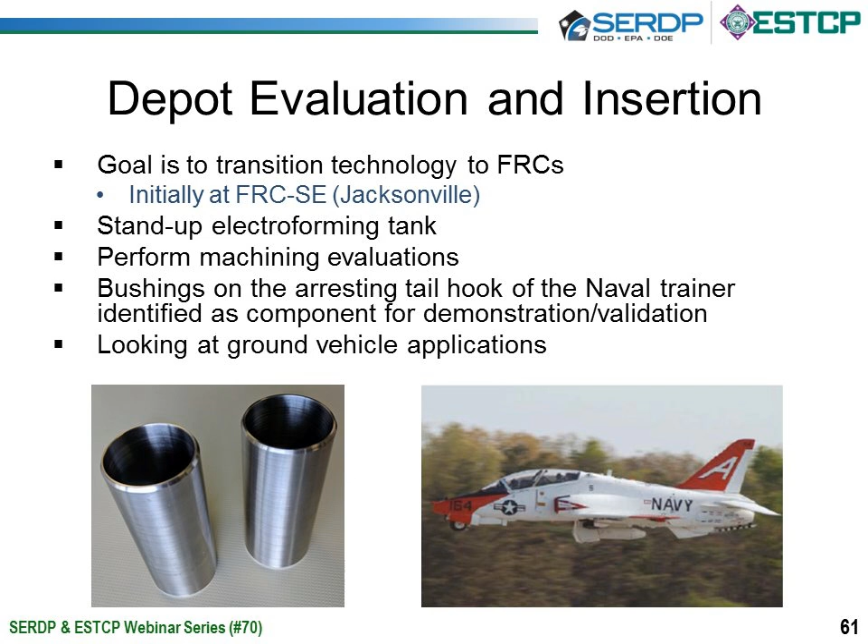We're also looking at potential applications for ground vehicles. There's on the left there a pair of bushings that were prepared for a ground application. So there are quite a number of potential applications for these materials.

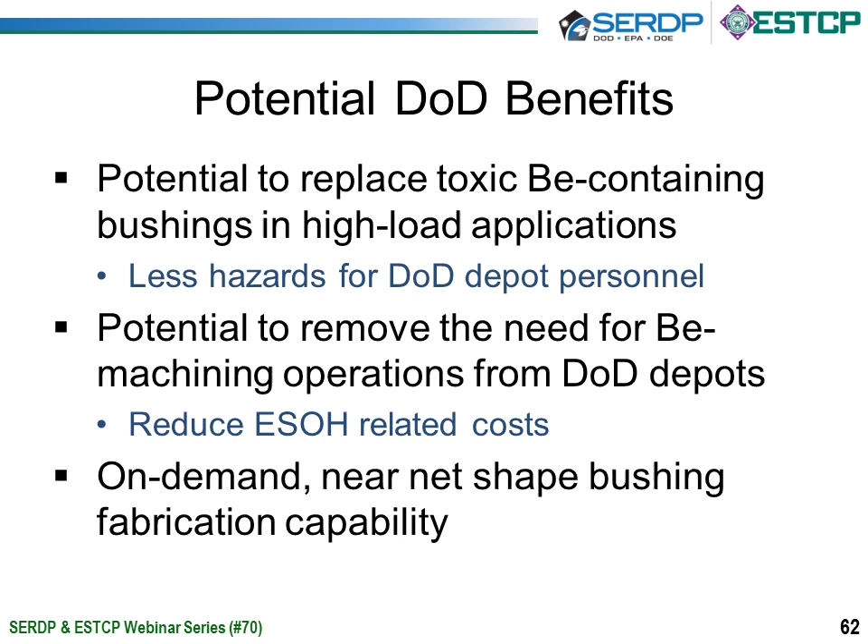In terms of the DoD, what are the benefits? Well, the primary benefit, of course, is a significant reduction in the use of beryllium-containing materials, which present less hazards for DoD personnel. In addition to the reduction, there are also potentially significant performance advantages of the nano cobalt alloy over copper beryllium, which may lead to enhanced product lifetime and reduced operating costs. From a depot level, the ability to prepare bushings on demand with a near-net shape fabrication capability is quite desirable. Hopefully this will reduce the turnaround time between repairs and present some readiness advantages.

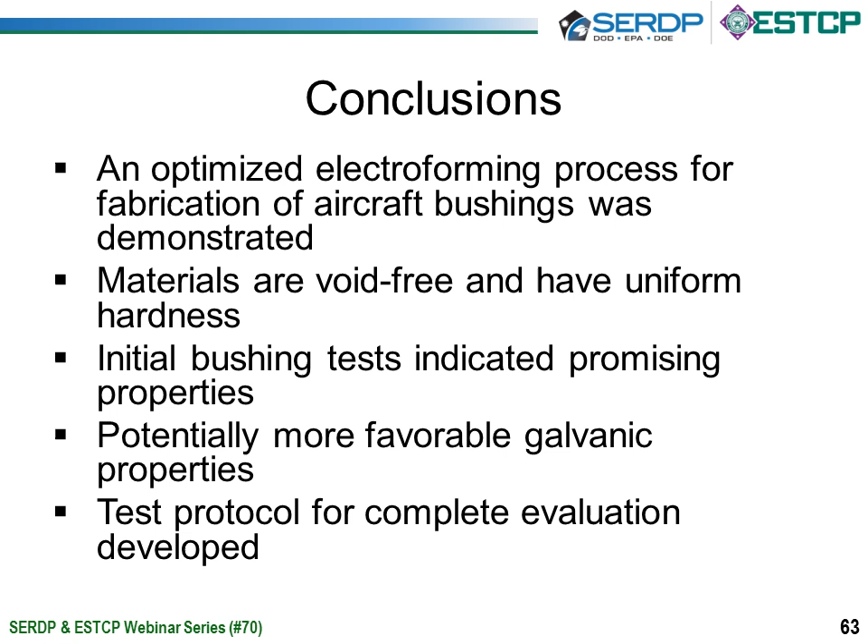In terms of overall conclusion, where we are right now, an optimized electroforming process for fabrication of bushings has been demonstrated at the lab scale. Materials are void-free and of uniform hardness. The initial bushing tests have indicated some promising properties. They have potentially slightly more favorable galvanic properties, and we've also developed a test protocol for complete evaluation.